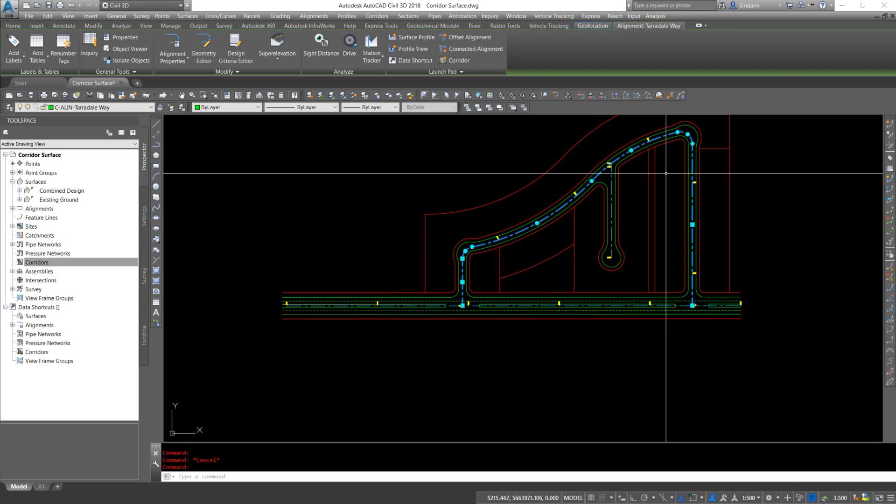So when we design a corridor, first we need to have a road center line. So we've designed our alignments for our three major roads here. So we have one going east-west, we have our subdivision road, and we also have our cul-de-sac alignments. Now when I zoom in on the ends of these, they are touching the other alignment. Now there's a display issue here, but they are perpendicular to the other alignments, and we'll need that when we go to design our intersections.

So we have our alignments laid out, and we've also created our vertical baselines. So we have, and I know I have a couple extra profiles in here, but we have our main road here. We have our subdivision road, and we also have our cul-de-sac road here. So we've designed horizontal and vertical, and now we can go about creating a corridor.

Now this is a little more in depth than creating a highway corridor. There's a few more things going on. There's also some things we don't really need to worry about in a residential road. Super elevation will be one of those things we do not have to worry about. The speeds are low enough. We just don't need to super elevate the road, and people are generally not going 50, 60 kilometers an hour around some of these tight corners.

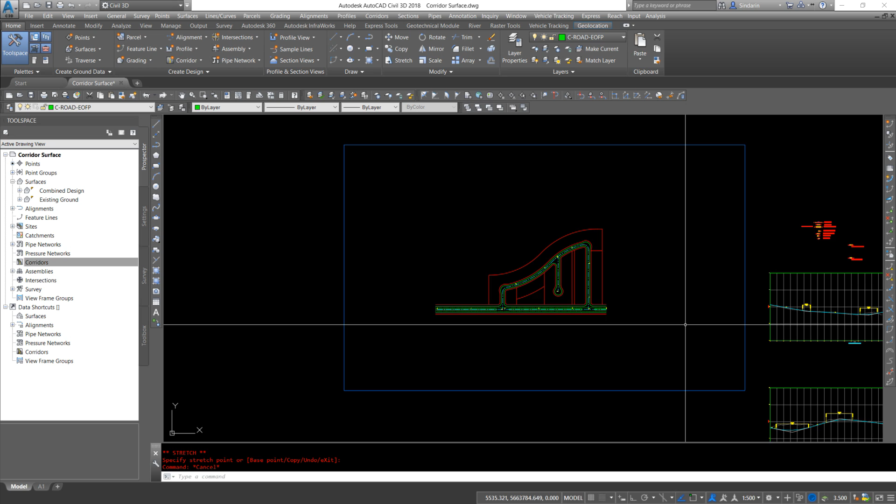So we'll start this off, and we're going to end up making 3 or 4 different corridor models. I like to keep my intersections separate, as they add quite a bit of information in your corridor. And if we keep them separate, we can still paste everything together at the end, and it will work just fine. It's a workflow thing. It's drawing stability and just trying to make your drawing work faster.

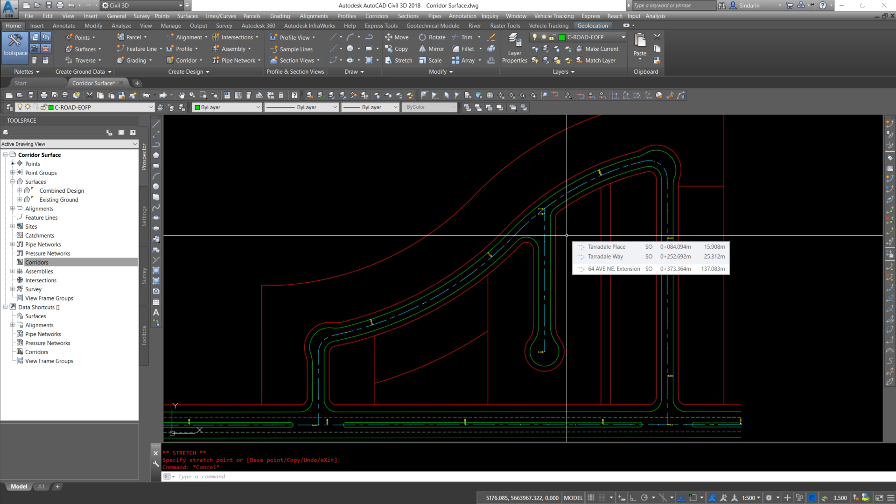So again, we have our alignments, we have our profiles, and I've gone ahead and I've already designed the vertical baselines here, and I see there's an issue that happened with this one when I deleted some stuff, but we can take care of that. So first things first, we need to make a corridor of our main road. Actually, before that, we need assemblies.

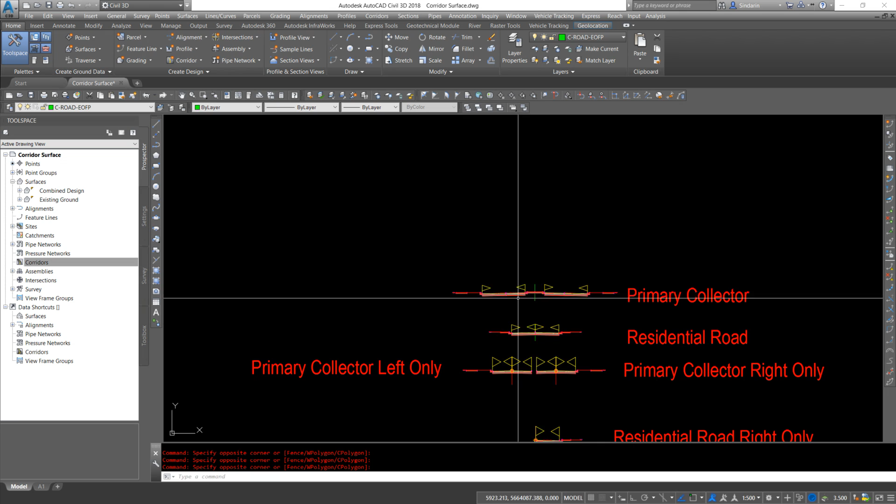So we'll start off with our 2 basic assemblies. We have our primary road, which is the one going east-west, and our residential road. So these 2 right here. And those will come from the design guidelines provided by the city. Our primary road has 2 lanes each direction. Our residential road's a little bit smaller, has sidewalks in certain locations. So you'll go to the city guidelines and design those. So we have our 2 assemblies, and don't worry about these other ones yet.

So we'll go to corridors, create corridor, and we're just going to name this residential road. Keep the default style. Our alignment, we need a typical alignment or a starting alignment, and then we can add things to it afterwards. So I'm just going to choose the east-west road down here. So my 64th Avenue extension, my 64th Avenue design profile.

Now again, naming things, keep things named properly. So I've named this 64th Avenue design. I know this is my design profile. I want it to follow this. This one will be my existing ground profile. So I'm choosing design here. On my assembly, my primary collector assembly.

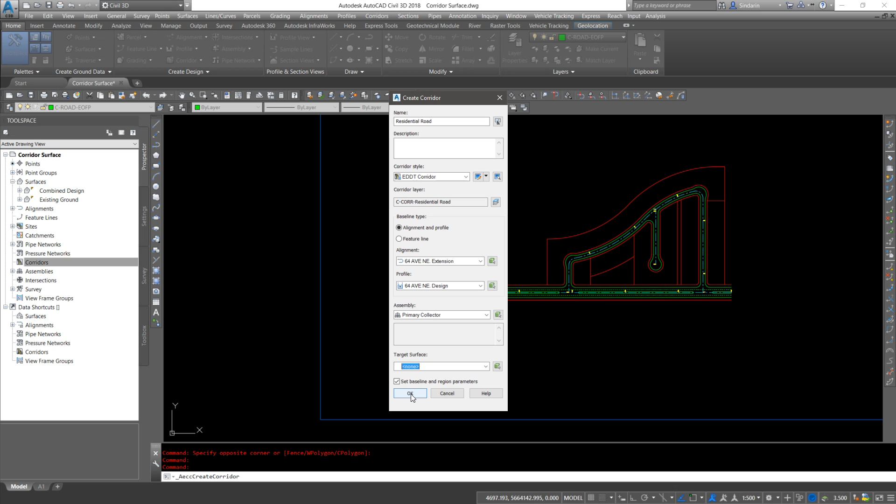And I don't want to target surfaces at this point, as we will set that up in our surface grading at a later time when we do our lot grading. So we'll leave the set baseline and region parameters selected. It won't create a corridor yet until I click OK. So I've clicked OK, and here's my starting corridor. So my 64th Avenue extension, that has highlighted my road east-west. This is what it's going to build. Let's go ahead and add these other 2 roads in, and then we'll go and start removing unneeded areas.

So the first thing I'm going to click on is add a baseline. This one I'm going to name residential road. Baseline type, alignment and profile, my alignment. I'm going to choose the Tarradale Way one. Actually, let's name this Tarradale Way. So I'm going to click OK.

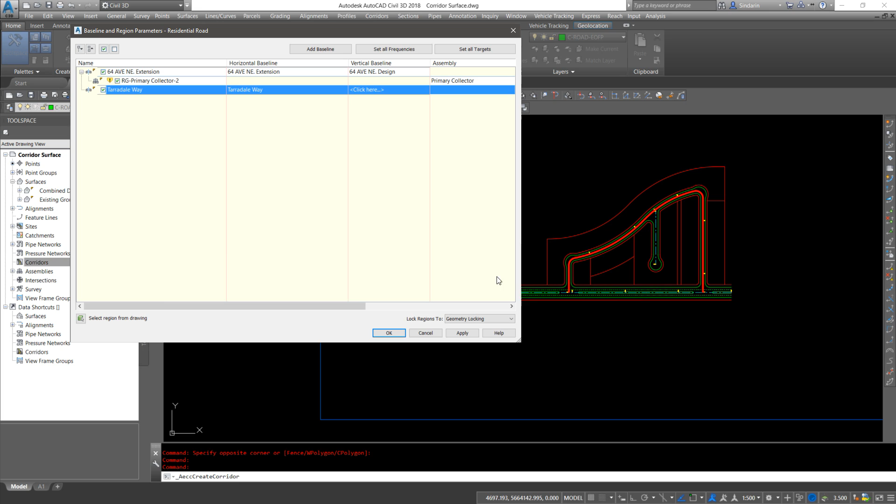And it's added a secondary baseline, and then when I click on it, you can see it's highlighted this alignment as well. My vertical baseline, I already have a Tarradale Way design, so I'm going to click OK. The next thing I have to do is right-click on the Tarradale Way and add a region. So I need to add a corridor region to this in order to build it.

Region name, I'll just leave blank for now. And the assembly I want to use is the residential street one. So my road east-west is a primary collector. My internal roads here are residential streets.

So we've added Tarradale Way here now. Let's add in our cul-de-sac. So I'm going to add another baseline. And I believe, yeah, Tarradale Place. And we'll click OK. And again, I've had my Tarradale Place design. I'm going to right click, add another region, and choose my residential street.

So I have my 3 roads in right now. And if I move this out of the way and I click on them, there's Tarradale Place, Tarradale Way, and 64th Avenue. Now I'm going to set all frequencies, and again, be careful with this setting, as the more frequent modeling you have, the slower your drawing will perform and will update. But I'm going to set it to 5 right now, just to give me a little bit more of an accurate model. Feel free to leave it at 10.

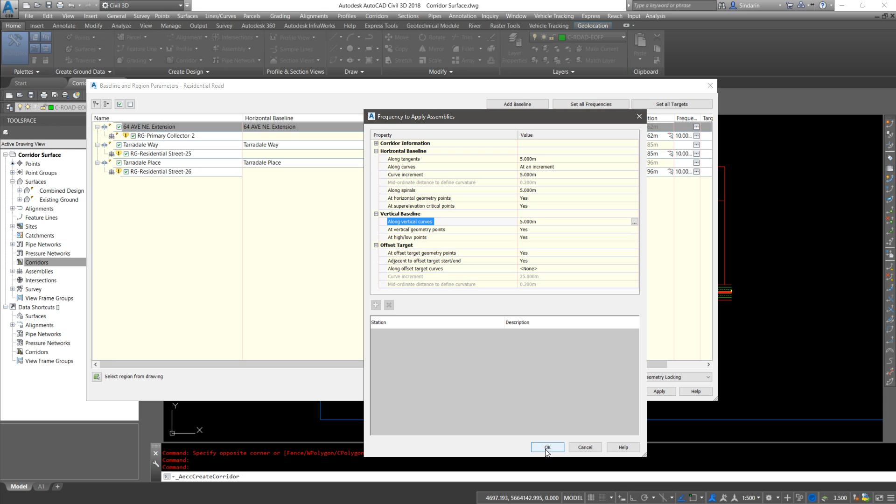You can set it to 1 if you want, but you might be sitting there for a few minutes while things rebuild. So I'm going to click OK now, and we're going to see what Civil 3D creates for us. So click OK, click Rebuild the Corridor, and this is what we're left with. So my road east-west, and then my internal roads.

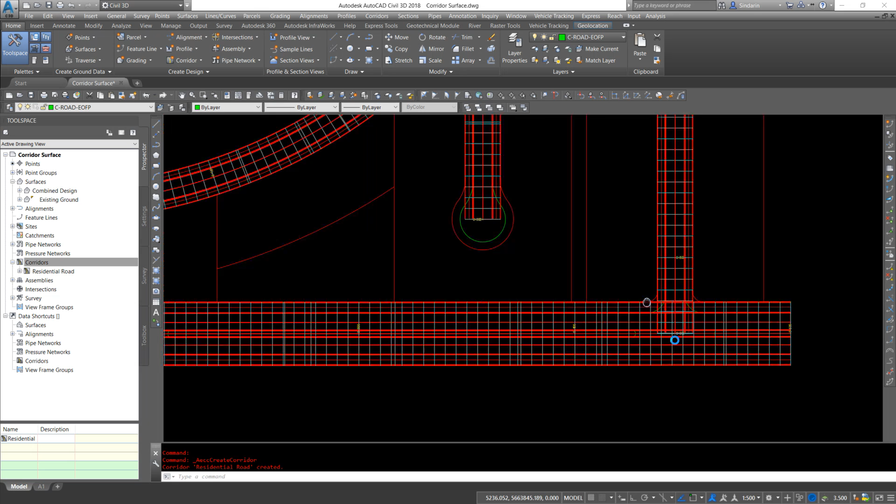But if I click on my corridor model, you can see that it's building the residential roads into my main road. Now, if I go to make a surface from this, it will be all messed up. It's not going to look nice, and there's going to be glitches, and you could possibly cause problems. So part of the big thing with modeling a residential corridor is adding more regions under your 3 main headings.

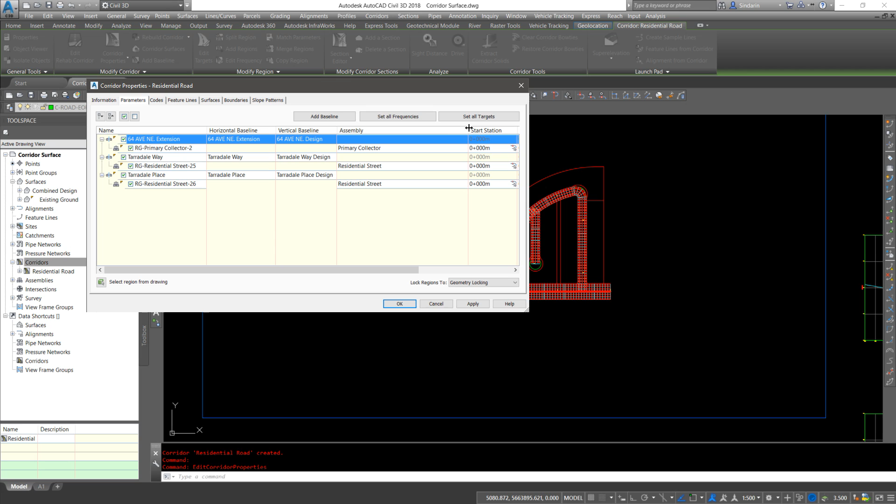So 64th Avenue Northeast, we're going to have 3 regions here, and we're just taking care of a part later on for when we go to add in our intersections. So I'm going to make this a little bit smaller right now so we can see everything. And we're going to have to concentrate on the start station and the end station. Oh, what happened there? So the start station and the end station.

Now, we want the road to build approximately from here to, we're going to go maybe 40-50 meters on either side of the intersections. So we're not going to build a road where this intersection is going to be. We'll take care of that after with the intersection tool. And the same over here.

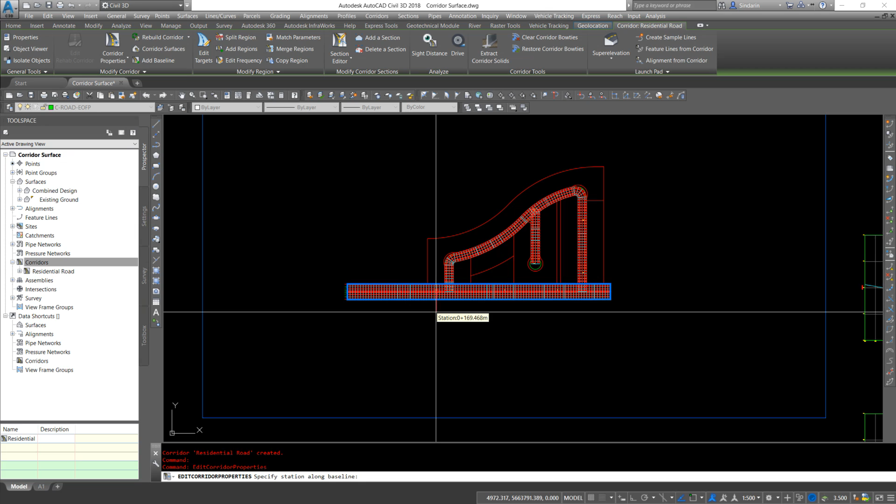So my start station will be 0. My end station, I'm going to use a station picker here. And I'm going to just click approximately there. So to the west of the intersection a little bit. And again, station 163, give or take a little bit. Now, to keep things organized in my drawing, I'm going to rename this 64th Avenue Northeast West Section. So this is the west section of the road that will be built.

Now, to model the rest of it, as you see when I click on this, it only is going to model this. If I hit apply and rebuild, you'll see. We now need to tell it to model in the center section here. So I'm going to insert region after, so right click on 64th Ave Northeast West section. Insert region after. I'm going to set it to primary collector, and I'm going to name this one 64th Ave Northeast Center Section.

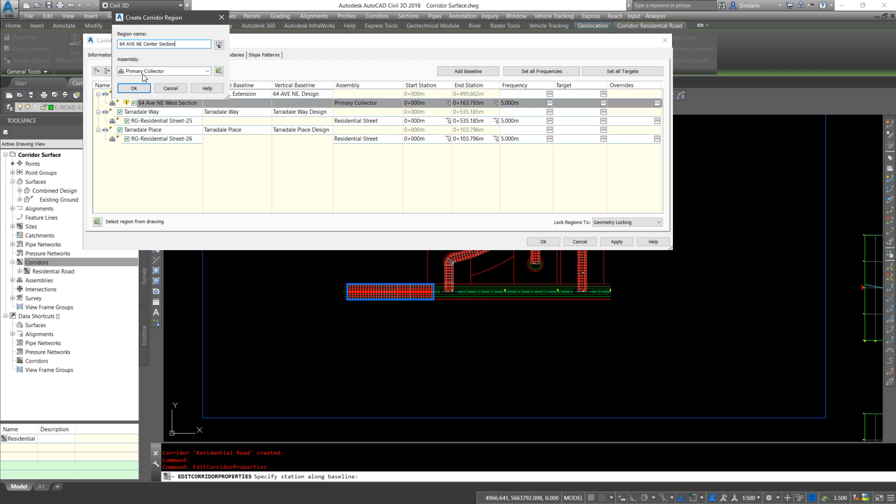So the more you can do to keep yourself organized in your drawing, the faster you're going to draft. You're going to know what you're clicking on. You're going to know when you're clicking on it. If you don't name anything, you're going to have a heck of a time trying to figure stuff out. So 64th Avenue Northeast Center section, primary collector, we'll click OK.

And Civil 3D has gone and said, okay, we see that this station ends at 163.793. We'll start this one off at 163.793. But we don't want it to do that. We want it to model on the right-hand side a bit. So I'm going to select the station picker again. And I'm going to drop it approximately here. And again, we'll clean all this up after when we get our intersections done. And my end station, station picker, I'm going to go approximately here.

So let's add in the east section now. So if we click on here, we're building that. If we click on there, it hasn't built anything yet, but let's apply and rebuild. And it's not highlighting it for some reason, but you see it popped in there.

Let's add our last section in. So we're going to insert another region after. Primary collector, rename it, 64th Ave Northeast East section. Then we'll click OK. Again, Civil 3D has taken the end station and just said, okay, there should be a road here, but we don't want it to build a road yet. So station picker, we'll select right there.

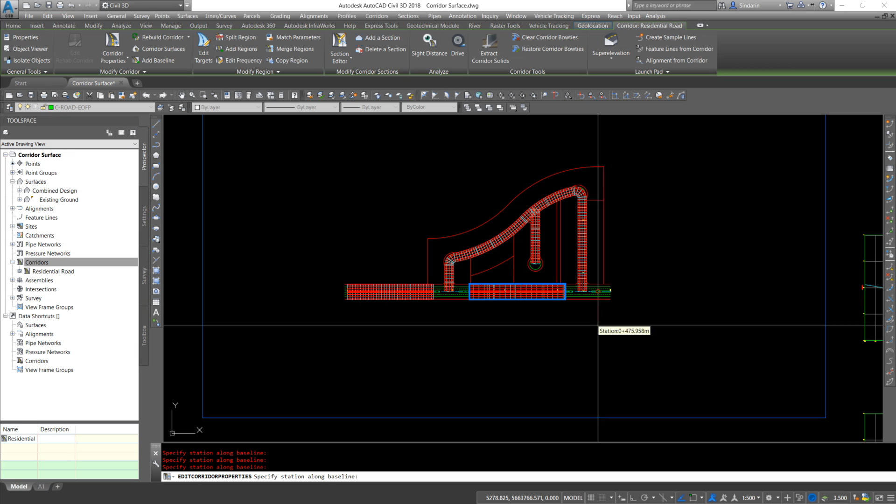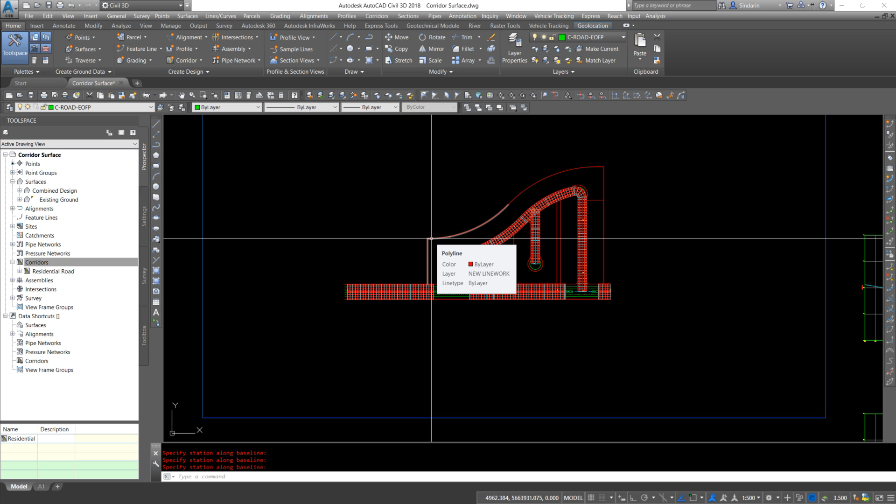So let's change all our frequencies. So these ones have gone back to 10. If you want, set them back to 5. And then we'll hit OK. We'll rebuild the corridor. So we have now gone and turned this south road into 3 separate pieces, but they're all in the same corridor. They're controlled by the same baseline. They're controlled by the same assembly. So we've gone and done that for this road.

Let's now do it for this road. And I'm going to go and take care of a couple things beforehand that I know we need to worry about a little bit later. So our road over here, we'll have to trim it around our knuckles. We'll have to trim it around the intersection. We'll have to trim it around this knuckle. We'll have to bring these two back a little bit. So select your corridor, right click, corridor properties.

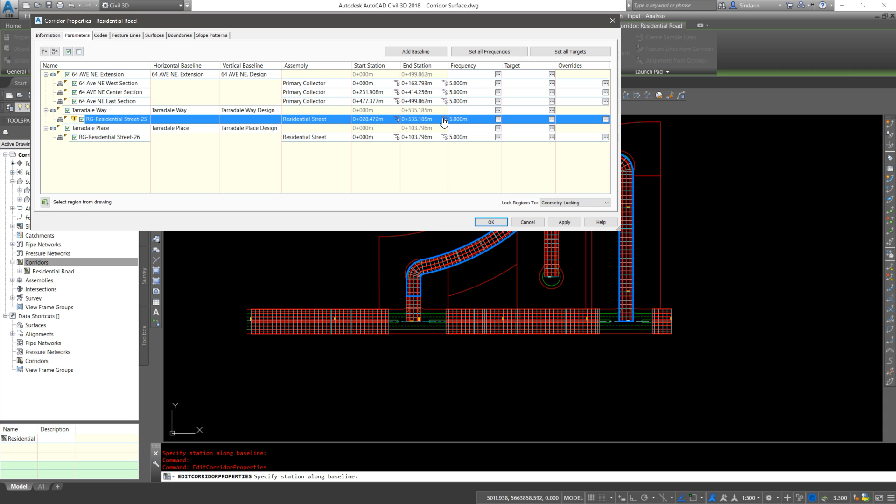So that is what I've called Taradale Way, and it's kind of hard to see on here unless I select this, but this is the road we want to modify. So my start station, I want it to be, again, station picker, approximately there. Now my end station for this one, again, station picker, I want to zoom in and I want to select the end of my knuckle arc. So let me just click OK for now. And if I click on my road edge, the end of my knuckle arc here, the outgoing arc, that is where I want it to end.

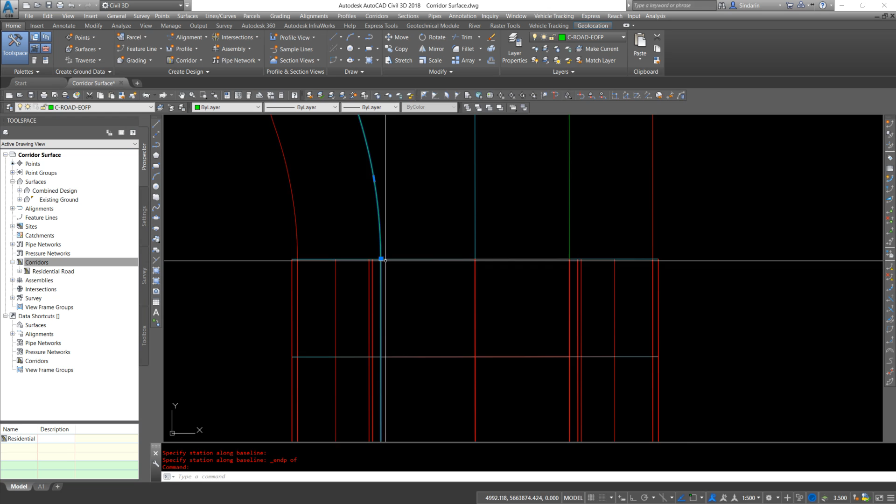We need to apply a different assembly, or 2 assemblies actually, for the actual knuckle. So back into corridor properties, and we're going to do this a couple more times as we do the other knuckles. So this is Tarradale Way West, just to keep yourself organized. I want to insert a region after, and again, Tarradale Way North, but it's the west section. And you're going to see why I'm naming these things here shortly as this window gets more and more populated. I want it to be a residential street as well. And I'll click OK.

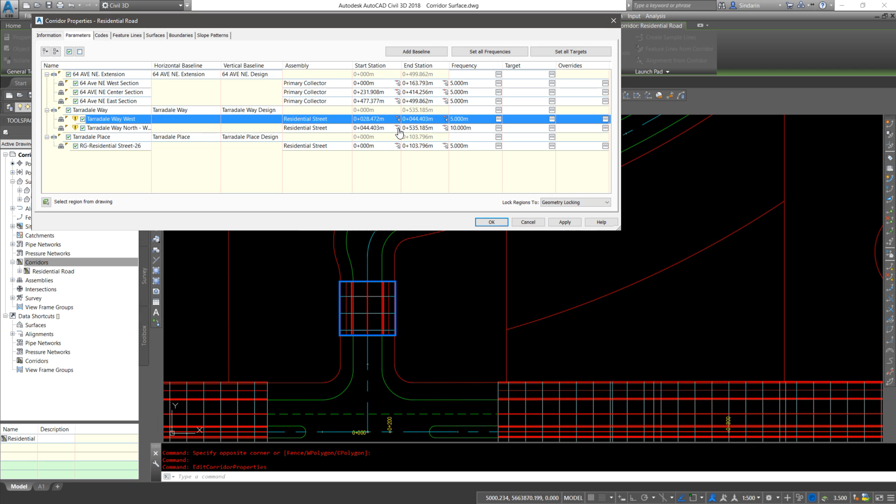And for my station picker, I'm going to pick the other end of the arc. So we have an arc here, we have a larger arc, and we have a smaller arc. So I'm going to pick the end of this other arc. And then ending station picker, I know we need to break it around the intersection, so I'm going to break it in here somewhere. And again, around the intersections we can clean it up afterwards, so don't worry too much about the station right now.

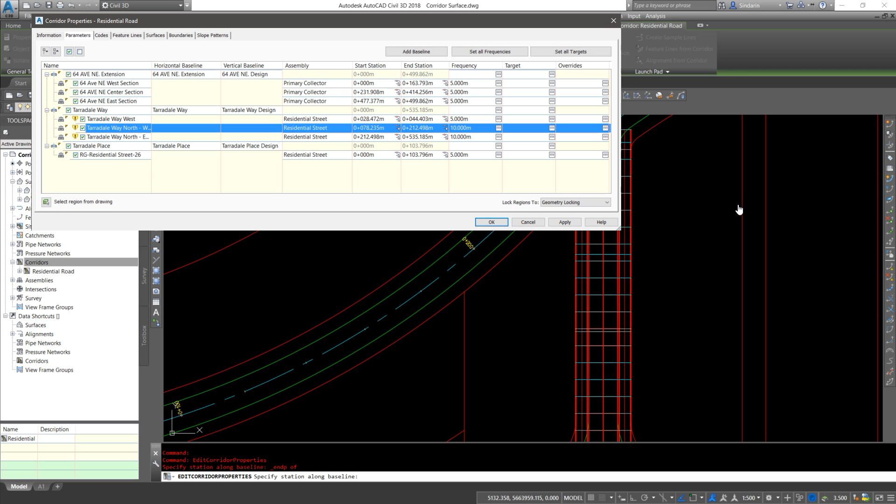I'm going to insert an additional region after, name it Tarradale Way North East section. Set it back for residential street. Click OK. My station picker, I'm going to pick on the right-hand side somewhere. My end station, we're going to set to the beginning of this arc. So the initial arc again. So we have 2 knuckles here that we need to worry about.

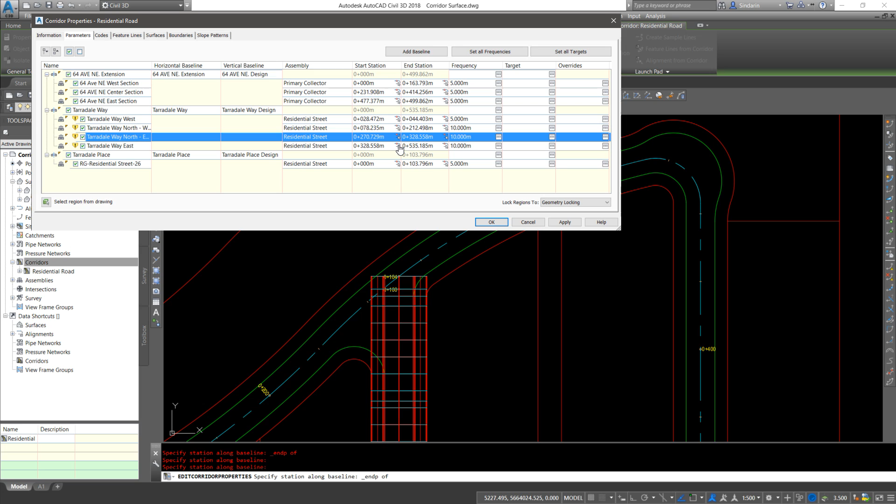Again, insert another region after. Tarradale Way East. We'll set that for Residential Street. We'll click OK. Station picker for the start station. We're going to select the arc going out. And the final station, we don't want it to build into the road down south, so we'll select approximately there.

So we'll set all frequencies again. We'll go to 5. And again, Civil 3D will default to 10. Whatever your CAD lead has set up, it'll default to that. We'll click OK. We'll click OK. We'll rebuild. So my corridor is now in 8 pieces if you want to look at it that way, but it's still all one corridor. It's still all one object, and it's all building off that one window.

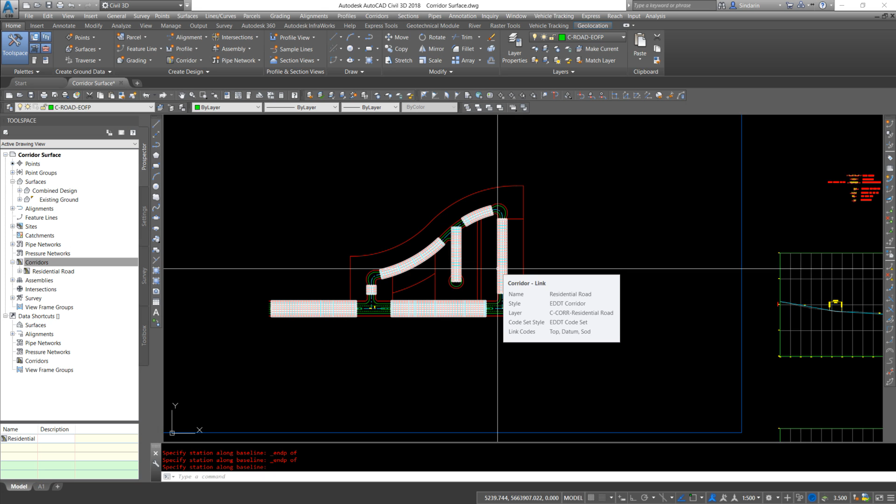So let's change this cul-de-sac one a slightly different way. So if we click on things, and again, be careful when you're grip editing stuff. If we click on the object, we see some grips here. Now these correspond with what's in that window. So I can select this grip and I can bring it down a little bit. So I want this to build maybe to there.

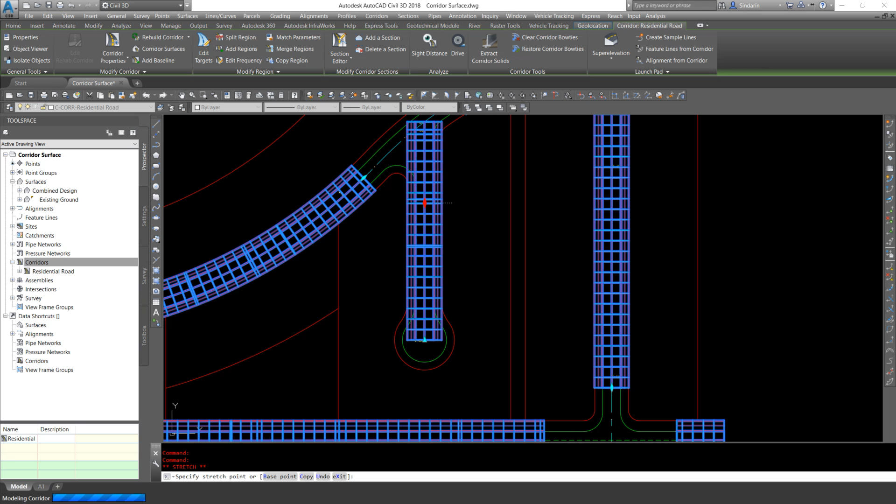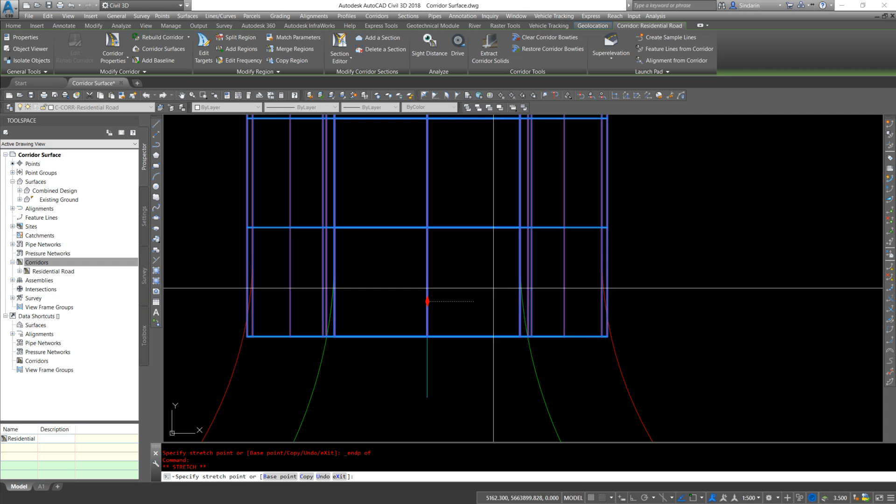And again, on the bottom one, if I want to click on the grip, same with the knuckles. I want this to end at the end of this green arc. Now again, be careful when using snaps. As we see, that didn't quite work. So I'm going to try it again. Go to the end point of this green line.

So these are where the arcs for our knuckles and our cul-de-sacs end. So that is the last time you'll see, if you want to think of it this way, this part of this road section. After that arc, your road is going to start getting wider, and we need to perform some additional commands in order to do that. So we got our road sections here. Let's save our drawing. In fact, you should save it quite often, being first time through this.

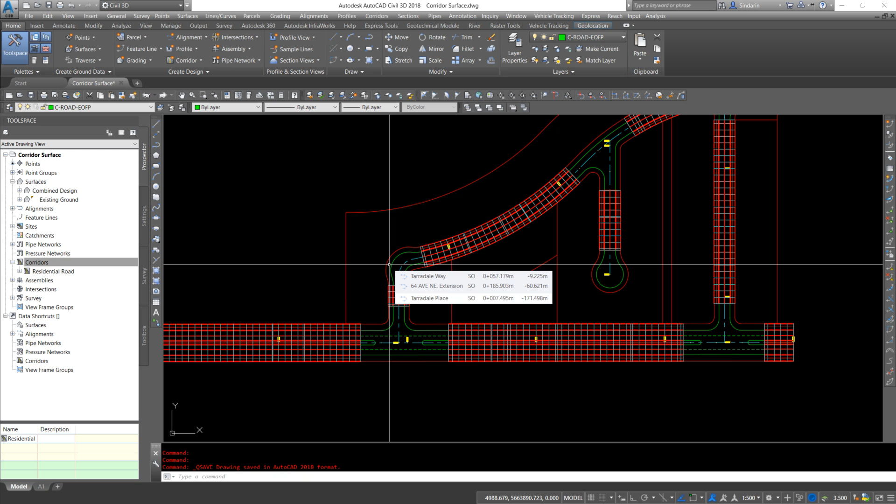So once we have our drawing saved, the way we need to handle our cul-de-sacs and our knuckles is slightly different. So when we go through a knuckle, and we'll start with the knuckle over here, I'll run all the commands the one time, and then I've got the other 2 already generated for me. So we have our west knuckle here. We need to apply a corridor target is what it's called. So we need to have our assembly follow a different baseline for this so we can build the road properly.

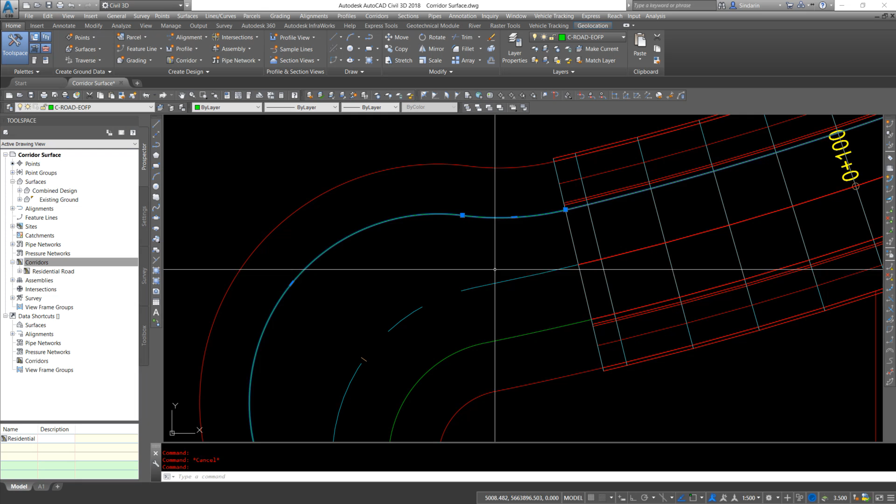So if I zoom in, I click on this green line. This is my edge of road. My corridor stops here. My corridor starts again here. So the first thing I'm going to do is draw a polyline. So I'm going to have my polyline follow this. So I've snapped to the end of the green line. I want to arc with the second point, and I want to snap to the mid, and then I want to snap to the end of the first arc.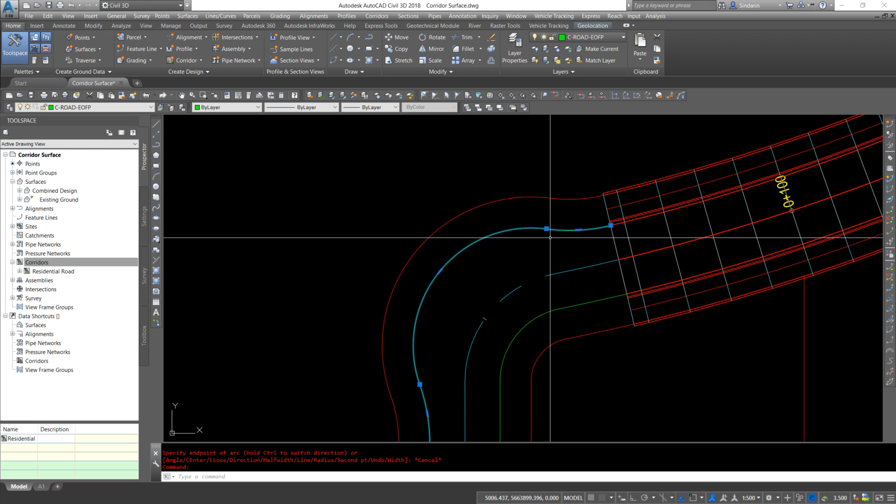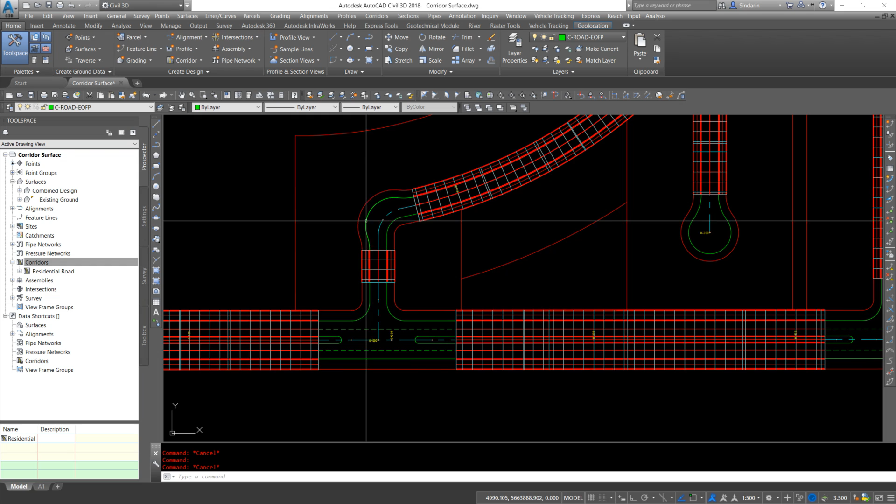And again, second point, midpoint of this arc, snap to the end. And we'll do that a third time. Second point, mid, end. So I've got my polyline. I'm going to hit escape. If I click on it, I now have one polyline instead of the long one that's along here. So one polyline here. Now we need to turn this into an alignment. Well, why do we have to do that now? We need to tell the corridor to build an assembly along here. So we need to define a horizontal and a vertical.

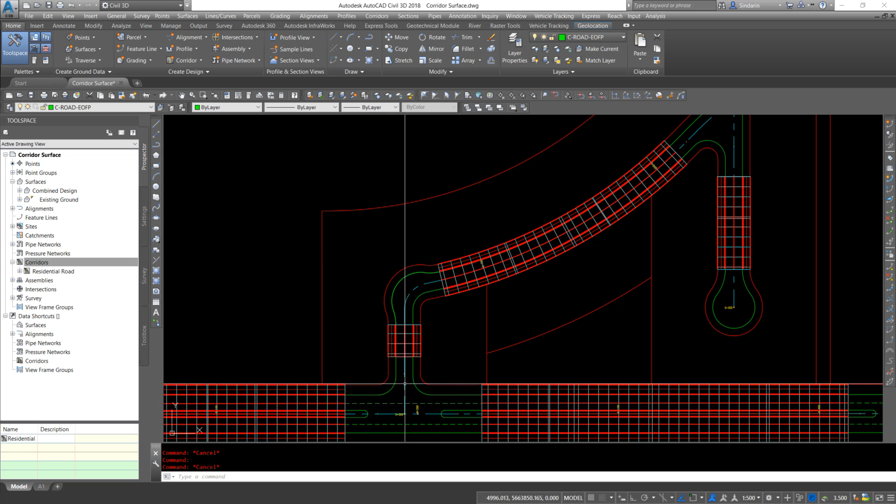So as you see, I have my 3 main alignments here. I also have 2 additional ones here. So this is for my cul-de-sac. This is for my northeast knuckle. Let's build one for the west. So direction 100% matters when you are building these. Your alignment should try to go the same direction as your main road alignment. So station 0 down here, increasing up here. We go to station 200, for example. Your station should be 0 here, come up around the corner, and end at about 30, maybe 40, whatever it happens to be. So we're going to, alignments, create alignment from a polyline.

I'm going to select the polyline. I'm going to make sure to select the polyline that I just drew and traced over top. So I'm going to hit enter. And even though I drew it in a north direction, Civil 3D for some reason has flipped it around and is pointing south. So this is how we can tell if our alignment's going the right direction. Knowing that 0 is down here and it increases in station to the north, I know this needs to be reversed. So I will reverse that alignment. So just hit R, enter.

Now again, name things as descriptively as you can. We only have 2 knuckles in this project, so I'm going to name this west knuckle. Type, we'll leave it for center line. Start station is OK, 0. Remember, no sites for alignments. Center line, it'll layer it for us. We'll deselect add curves, and we want to erase the existing entity. We don't want it to put curves as we've already done that. So I'm going to click OK.

And I now see I have an alignment starting at 0. It goes around the corner and ends at station 44. So there's our horizontal. Let's quickly create a vertical. So profiles, create from surface. I want my west knuckle. I want existing ground.

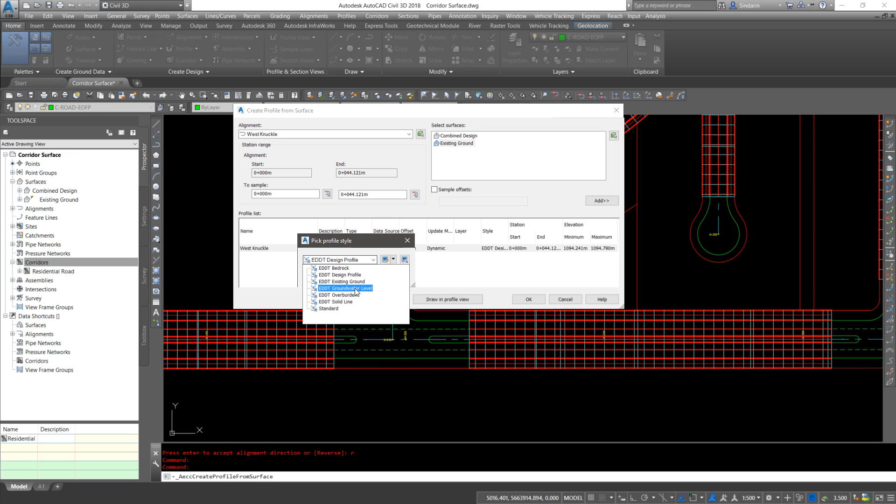And make sure it's set to the existing ground style. So click on the style button here. Existing ground. Okay. We will draw in profile view now. And we've already done this a few times, so I'm going a little bit faster. I'm going to name this west knuckle. Just west knuckle for this one.

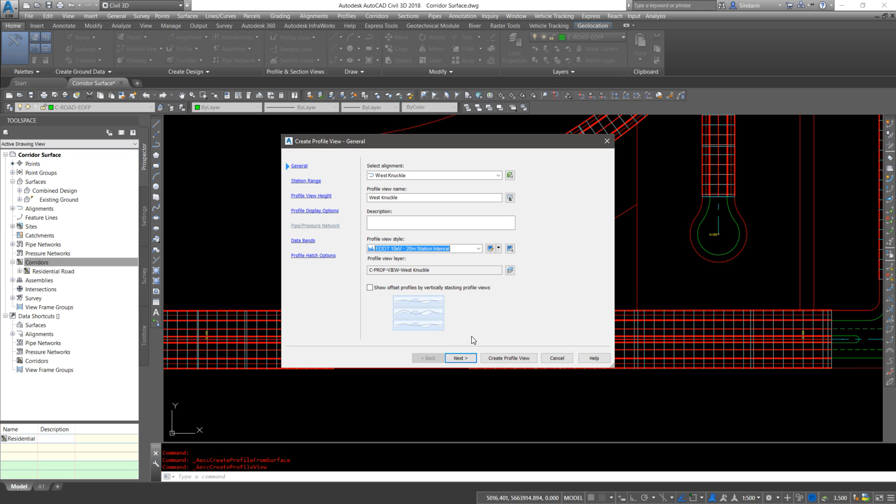And then I'm going to set it to 10 times vertical, 20 meter station interval. And then create profile view. So I'm going to place this just beside these other two. And it's drawn the existing ground for me.

Now, when we design a road, we need to be able to tie into the design elevations. So we don't have a surface built for this yet. So let's go into our corridor properties and define a surface. So select your corridor, right-click corridor properties, surfaces tab. We want to add a data link. So top left corner, create a corridor surface. Specify code, we have to make sure to click the top button to have it build it.

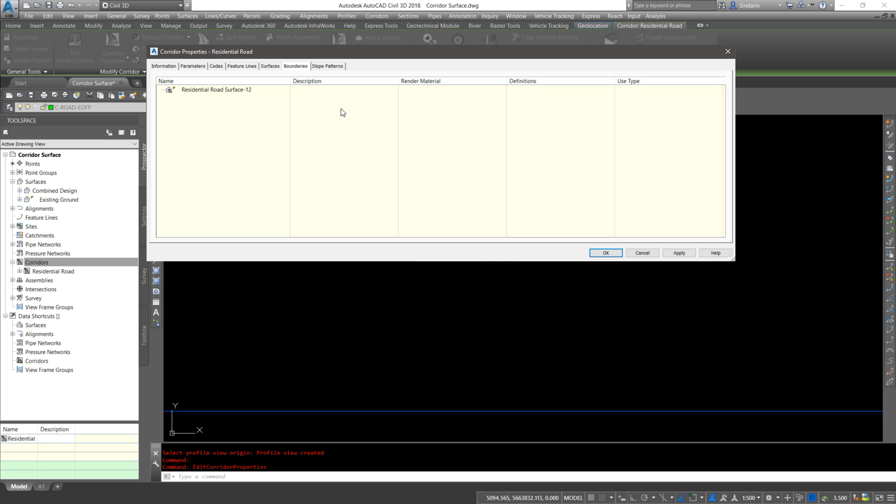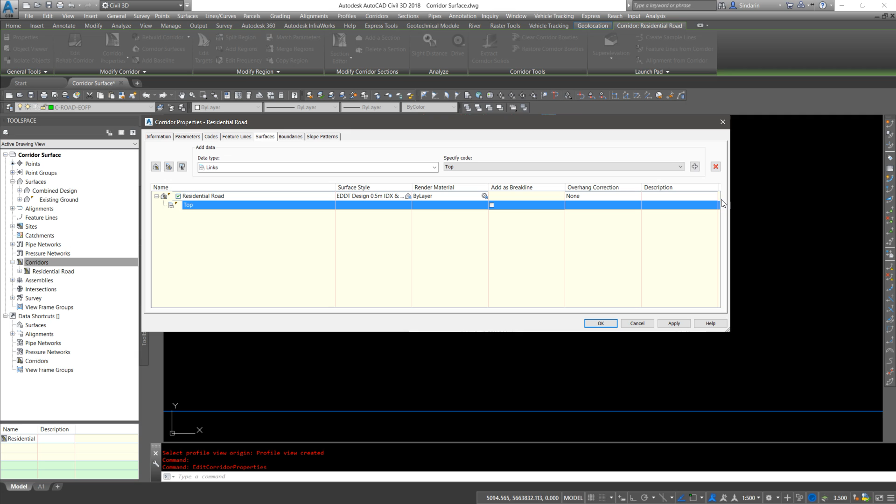Now, we're not going to add a boundary because our corridor is very segmented and it will probably only build a surface around this section. So, back again under the surfaces tab, residential road, we'll just name it residential road. And I'm fine with the style of being 0.5 and 0.1 for now. We can clean it up later. So again, surfaces, just name it residential road. Make sure to add in the top column. We'll click OK. And we'll click rebuild.

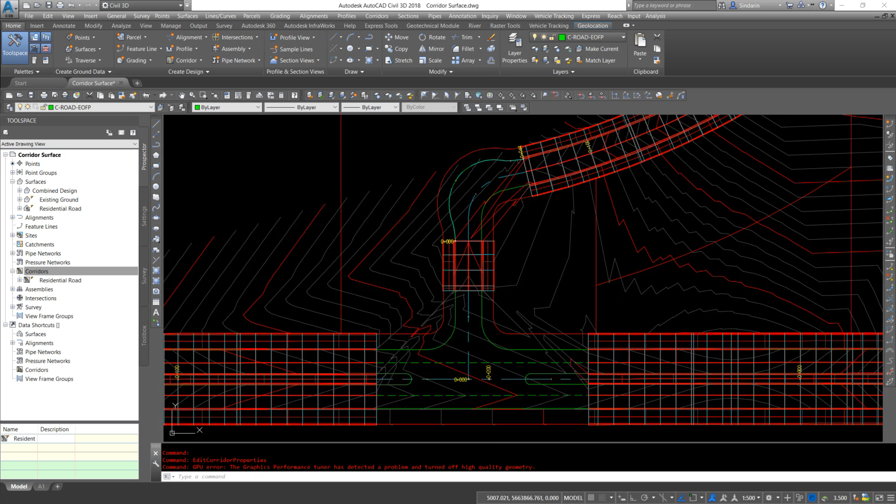So this has made a little bit of a mess for us. And the reason it's happening over here is because part of my profile is missing. But I can clean that up later. So we now have a surface here. Again, yes, it's a bit of a mess, but what this means now is that we can go into our profile, the one we just made, so our west knuckle. We're gonna add that design surface in so we can see where those road edges are.

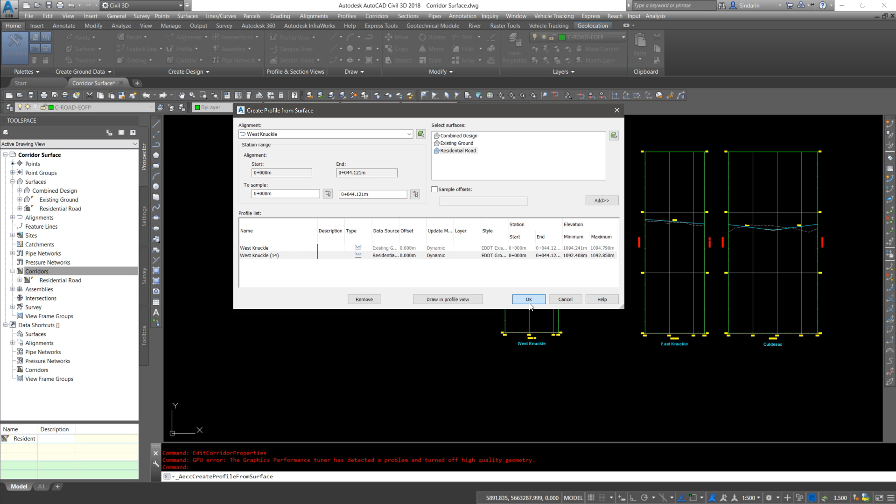So we're gonna go profiles, create profile from surface, choose our west knuckle again, add in our residential road surface. Actually, let's set it to groundwater so we can tell the difference. Again, we're just using this temporarily to know where to put our design line. So I've set that for groundwater. I'm just going to click OK now. So our existing ground is up here, but if we zoom in down here, this is where our design line is.

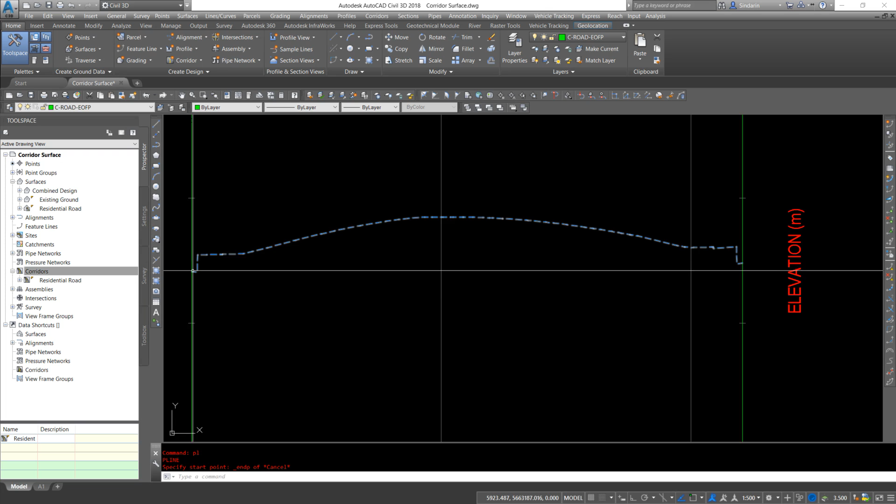Can I snap to the end of this properly? Yes. So knowing this, we have our curb down here, it comes up, and then it's just building whatever in the middle, and we have a curb line down here. So what we need to tie into are the ends of these blue lines over here. So again, I'm going to create a profile by layout. I want to draw a profile on my west knuckle. I'm going to name it West Knuckle Design. Don't worry about any design criteria. We'll click OK. And it'll bring up our West Knuckle Design tools.

Now when we're drawing these, as the distance of 44 meters is greater than the distance it would be along the center line, we still need to ensure that there's positive flow. So we may have to put in a low point, we may have to put in a high point, as long as water's not pooling and staying in the knuckle. So we can start off with just drawing a temporary line for now. We can add in points afterwards. So I'm going to draw just plain old tangents for now.

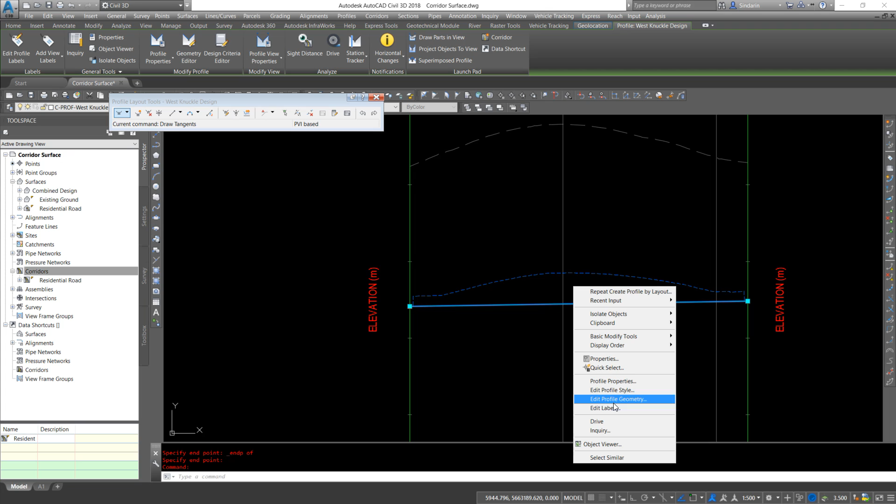I'm going to snap to the end of this curb line. So this is what I want to tie into. If I hover over here, it doesn't look like there's very much slope, but we'll find out here in a moment. And I'm going to snap to the end of that. I'm going to hit enter. So I've defined a one slope line. So let's go ahead and add some labels to that. So select it, right click, edit labels, lines, profile grades 2.5 is fine. Okay. So this is currently sitting at 0.16%.

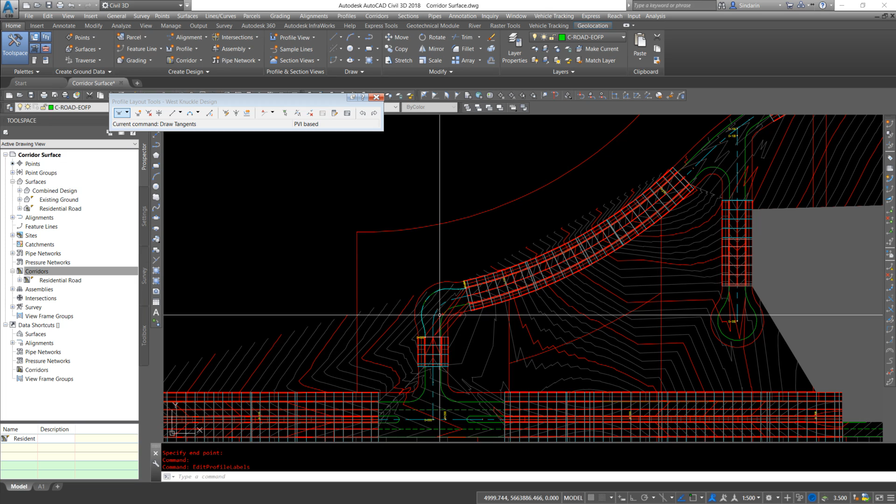So there's a couple things we can do. We can add a high point, which again, you have to pay attention to where your surface is grading, but my entire design comes down. I've designated this to be a low point. So again, when you do your main corridor, pay attention to what's going on. So I'm going to create a low point in here. So we're going to add in another PVI. So select the insert PVI. I'm going to click right about here. And then I'm going to hit enter.

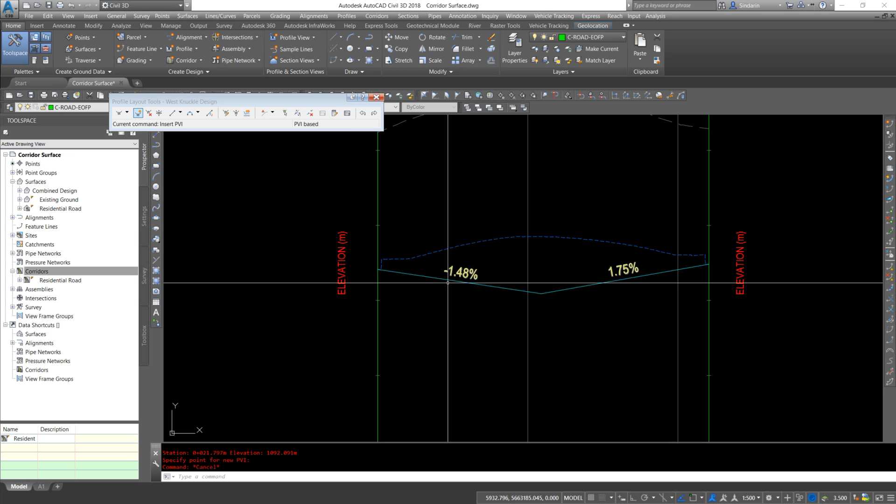So again, we can fix this afterwards, but I have minus 1.48, down to 1.75. That's a little too steep for what I want. So I'm going to come into, again, the same window. We'll select the profile grid view, which brings up this window over here. Make it a little smaller so we can see what's going on. And I'm going to change my grade out. So let's go minus 0.75 for now and see what happens. So it goes minus 0.75 down, 1.04 up.

So as long as we can keep it steeper than 0.5%, minus 0.5 or 0.5, that is enough on concrete to ensure positive flow. So I'm going to leave these values for now. I'm going to build that section of the knuckle. I'm going to see what it looks like in my corridor. So minus 0.75 down, 1.04 up. I'm okay with this. So we'll close this. We'll close this. And I'm going to pause the video momentarily and fix that surface.

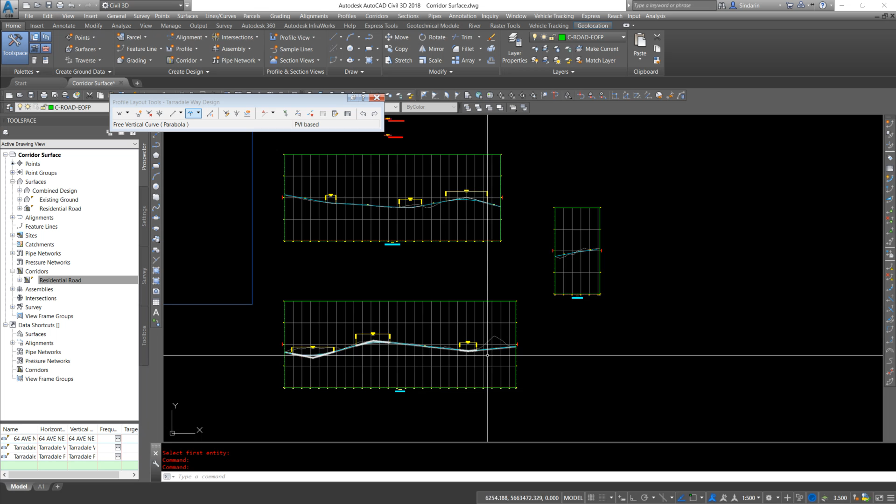Okay, the surface is being fixed. It was causing me a bit of lag because it was modeling contours all the way to 0. I didn't have any design information over here, so that's why Civil 3D was doing that. Now, we've got our design, we have our existing. If we are done with this line, we can delete it now, but I'm just going to leave it temporarily. We will need it again, more than likely. Roads, they adjust up and down. Our first design is never the perfect one.

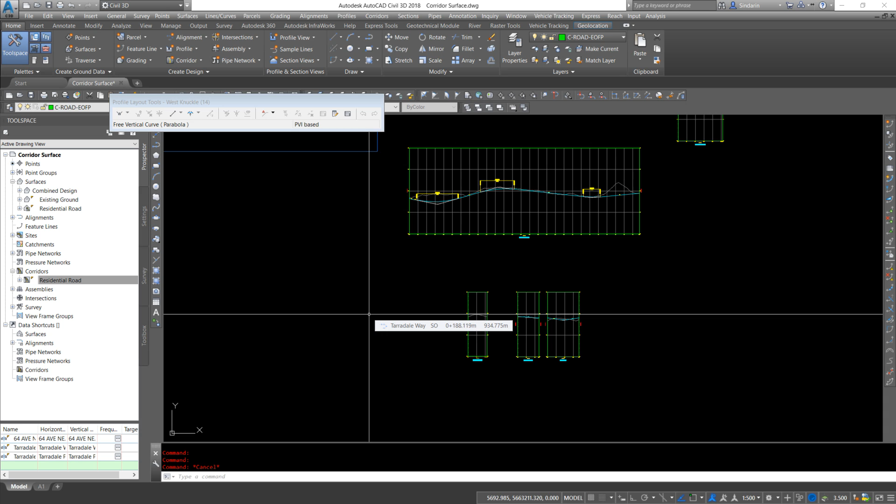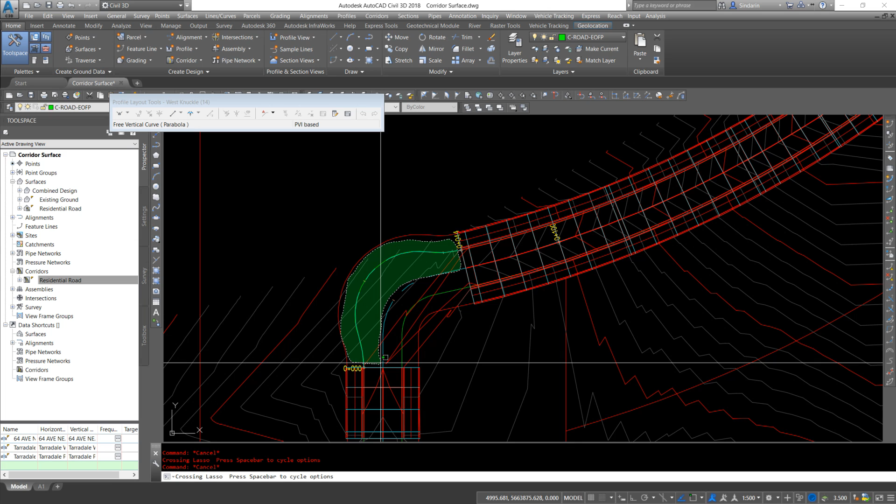So coming back to our corridor now, we need to go and add this into our corridor. But for that, we need additional assemblies. So the way we need to tell the knuckle to build, we need to specify this section of road as its own little assembly. So we need to specify that one separately. And then we need to specify the knuckle one separately. So this ends up giving us quite a few more assemblies in our drawing.

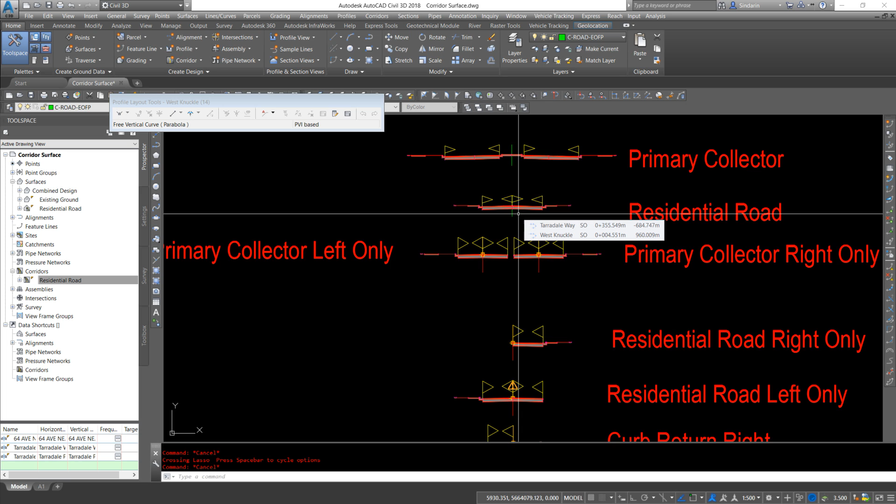So to run through them, and these are the ones that will be needed for the intersection, for the knuckles, for the cul-de-sacs. Everything you need to do will be covered with these assemblies. So we start with our primary collector and our residential road. Now, I've taken the primary collector one and I've created a left side only. So it still has the lane here. We have a lane on the outside. Again, I didn't worry about lane widths. Civil 3D will take care of this kind of for us automatically.

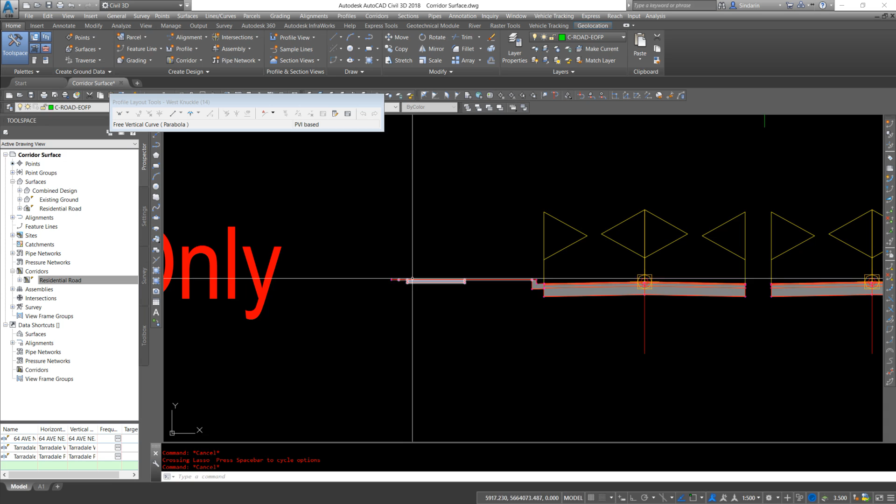But we have our curb, we have our sidewalk, and our additional little piece at the end here for building off our grading. So don't worry about this additional piece now. Just build your curb and your sidewalk lines. And I also have the exact same one for the right hand side. So we got our curb, our sidewalk.

And again, when you're making these, name them properly. If I go into the properties tab, select it again, primary collector, and I've just named it daylight right, primary collector daylight left. So we have 4 assemblies here. We have 4 more. So name things properly. When we get into that corridor properties window, it's going to help you immensely.

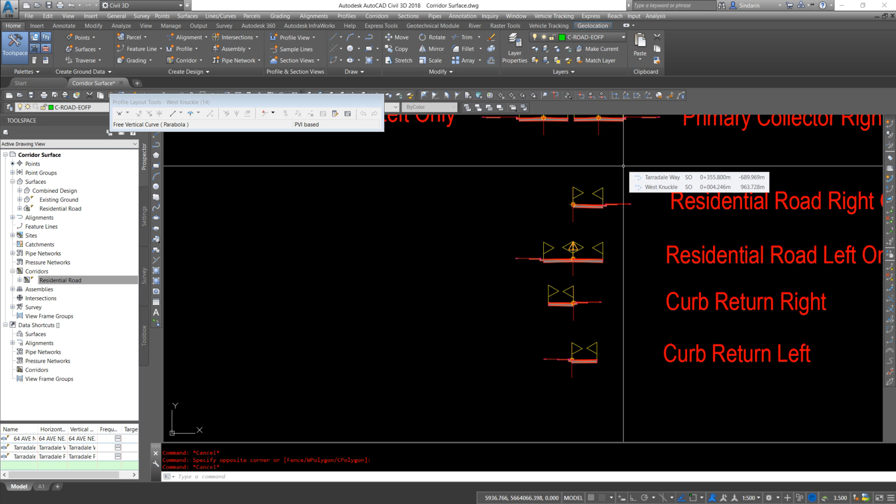We need our residential road right side only. So I've just copied that one, deleted the stuff on the left. We have our road, our curb, our sidewalk. We have our residential road left only. And ignore this warning symbol and pay attention to the right hand side. Now we need this for the cul-de-sac area. So when we're building the cul-de-sac area, Civil 3D doesn't quite do a good job because of the angles of the road, so we just need to trick it in.

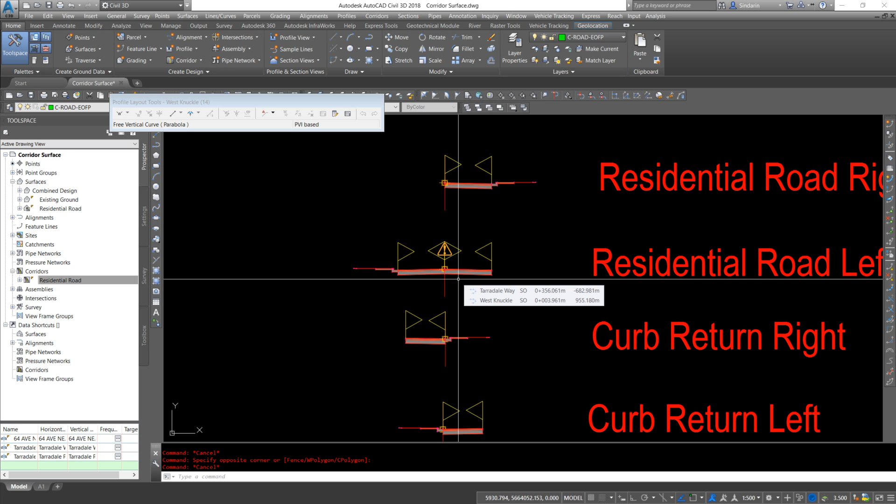And then we have our curb returns right and left. So when Civil 3D builds an intersection, it will use the right assembly. And depending what side of the road your knuckle is on, the direction of travel, you may use the right one for your knuckles as well. But with our road, we need the curb return on the left. So again, the center point of the assembly is right beside your curb and gutter. Here's our road lane, here's our curb and gutter, here's our sidewalk.

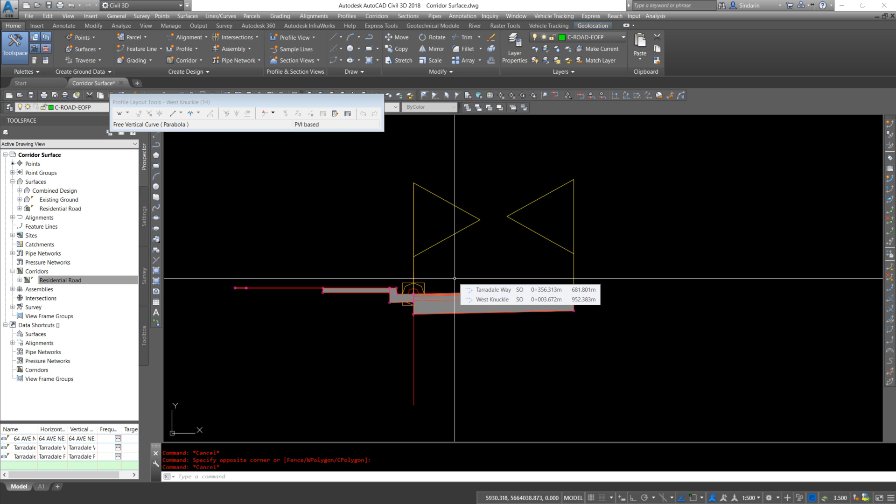Same with the left, curb return left. We have our road, we have our gutter, we have our sidewalk. And that is in the middle as well. So when we drew that knuckle alignment and profile, we will be using the curb return left to define that as a road. So this center marker will follow down that alignment, will follow down that profile.

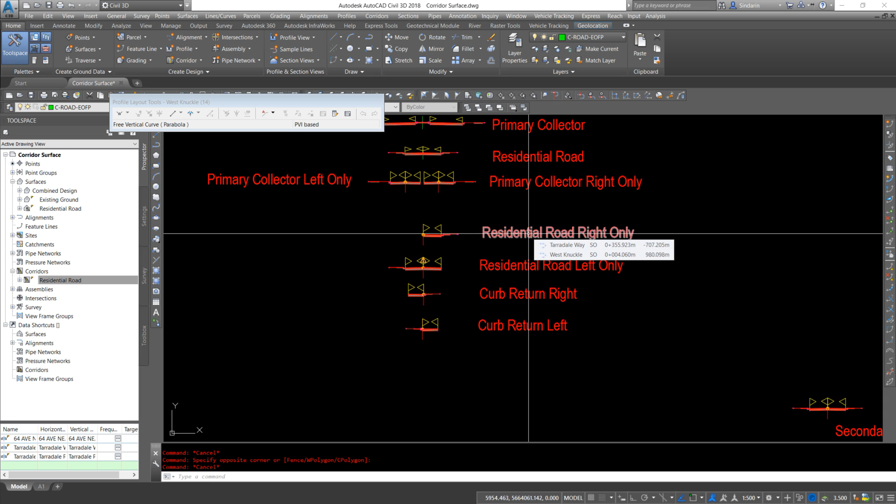So we need to use 2 different assemblies here for that knuckle. We need our residential road right side only. So I'll go build one piece and then we'll take a look at it. And then we'll do our curb return for the knuckle. So back to our corridor.

I'm going to select our corridor. Go back into corridor properties, the parameters tab. Now we want to modify the Tarradale Way. So we have our west section, then we have a blank empty area. So this is where I'll insert the right hand side only. Because direction of travel is from here all the way up, that's how we know it's our right hand side. So between these two, we need to right click, insert a region after. So we want to insert a region in here.

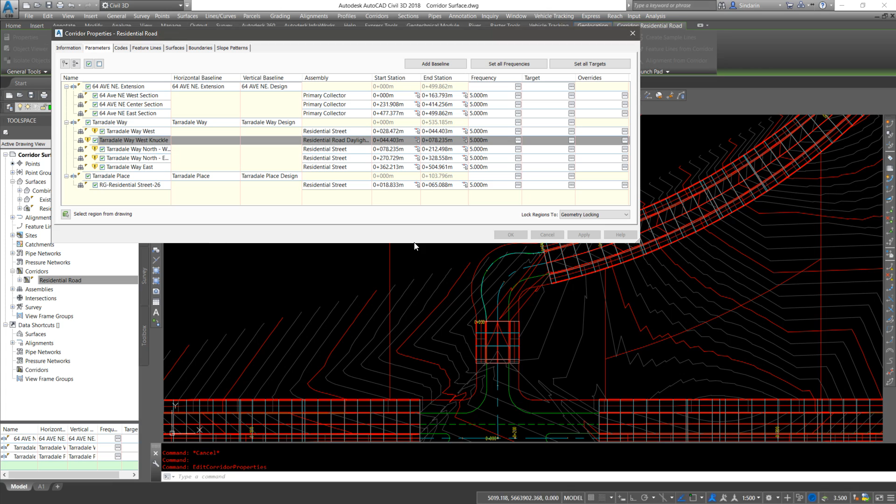I'm going to name it Tarradale Way West Knuckle. And my assembly is Residential Road Daylight Right. We'll click OK. I'm going to set the frequency of this to 5, just so we can see what's being built. And I'm going to hit apply and rebuild to make sure I've done it correctly. So because I've specified that right hand side one, it's only building from the center to the right hand side of the road. Now if I hit OK, my surface will update.

So now I'm going to go back into corridor properties. Now this is where it starts to get a little bit tricky. We're going to have more baselines. We're going to have more regions for our knuckles. So for this knuckle, I need to add another baseline. I'm going to name it West Knuckle. And my alignment will be the West Knuckle. So I'll click OK. My vertical baseline, West Knuckle Design. I'm going to right click, I'm going to add a region. I'm going to name this just West Knuckle again.

Now, the curb return fillets. So when we define this, I set it up for the left would have our sidewalk on it, the right would have our sidewalk on it. Now again, direction of travel, 0 is here, 44 is here. So we want curb return fillets left. And I'm going to click OK. And I'll hit apply to make sure I've done it correctly. Rebuild. And again, the reason it's truncating this is our frequencies.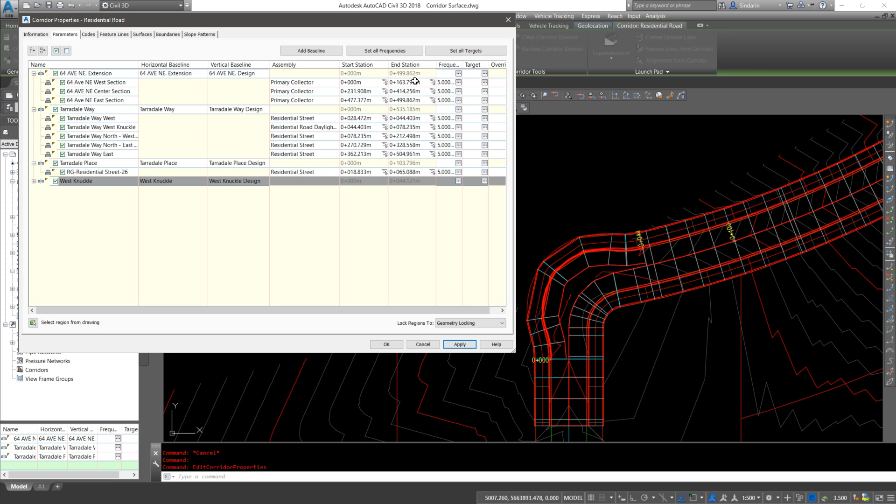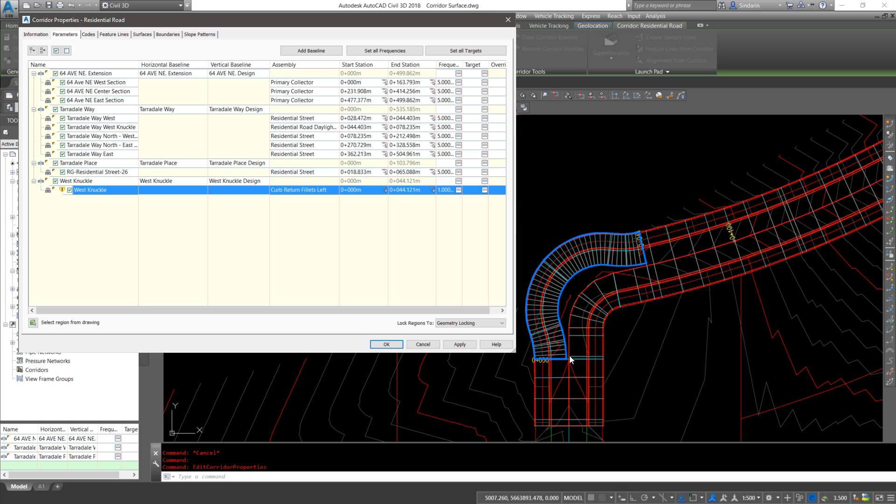So for this west knuckle, make sure you select the right thing. I'm going to set these to 1 meter. And I'll rebuild it so it just looks a little bit nicer. Did I not hit rebuild? There. So I've rebuilt it now, and it looks a lot nicer. But what can we see Civil 3D not doing? It's not building anything in the middle. So if we hit OK and let it rebuild the surface, it will still pop up, but you have a very obvious error here.

So if we go into corridor properties again, under west knuckle, there's one tab we haven't really played around with yet. That's the target tab. So I want the road piece to target something. I want it to target my center line. So I'm going to select the target here. It opens up another little window. So this is the corridor target mapping window. So for widths and elevations, I've already specified those in my main road, so my Taradale Way.

So my width target, I'm going to click on where it says none, and I'm going to find Taradale Way, and I'm going to add that in. So again, be very careful what you're selecting, and again, you can see why it's so important to name things properly. I'm going to hit OK. My outside elevation target, now I want the elevation at the middle, so where it hits the center line, to be the same as my original road. So I'm going to target the elevation target of 64th Avenue Northeast, or sorry, wrong one, Taradale Way, Taradale Way design.

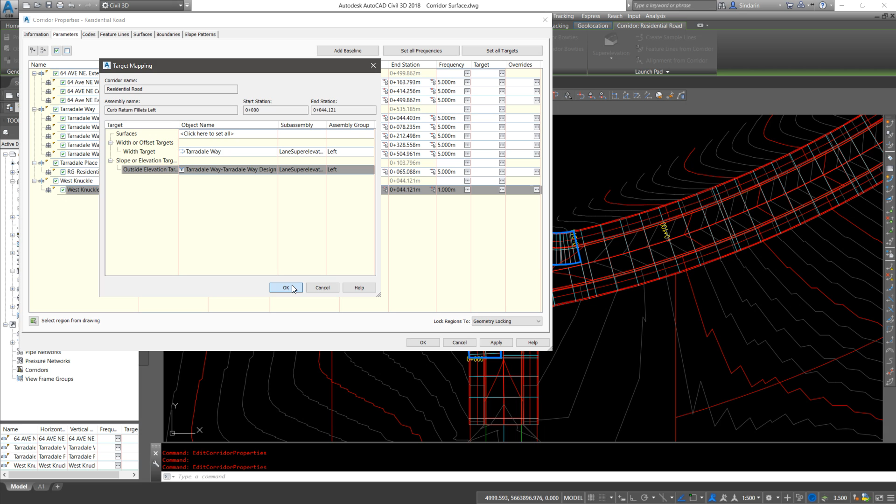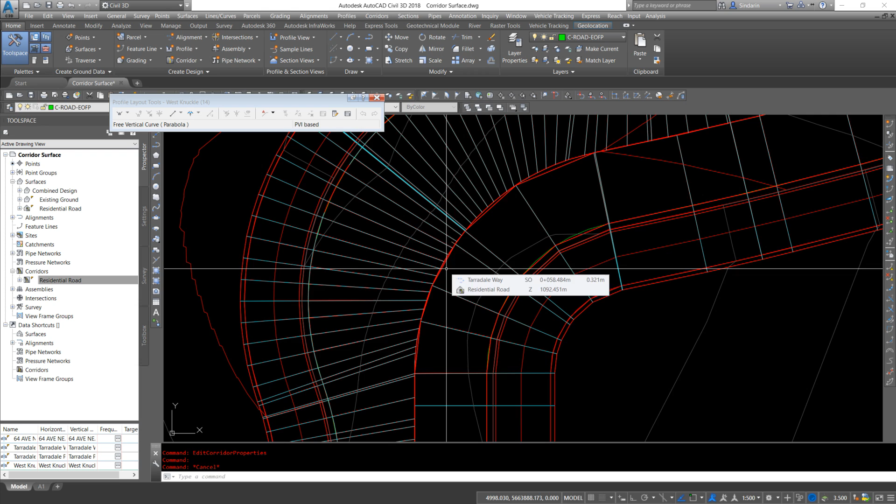So I've defined horizontally target Taradale Way, but target Taradale Way design, so there's no bumps in my road. So I'm going to hit OK. I'm going to hit apply and rebuild. And as we see, the corridor has updated. So now if I click OK and I zoom in, it has now built me a surface, and it's matched the high points in the road. We have positive drainage to a low point right here.

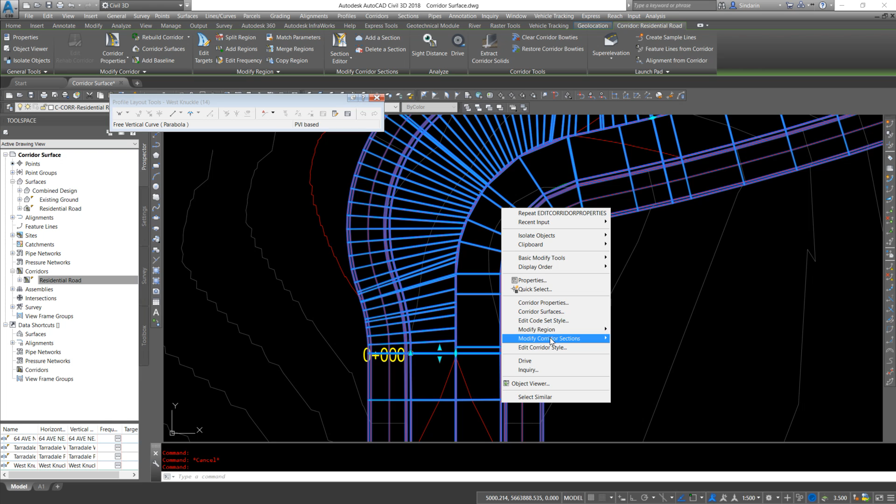We can see from the contour lines that we have a low point right here. And again, just experience to know that this would be a low point. We could turn slope arrows on if we want. Now, we have some more truncated issues down here. So we could go into corridor properties, and I'm just going to set all my frequencies for 1. Again, be very careful if you decide to do this. So I'm going to set everything for 1. It should make me a nice, relatively smooth surface.

A smooth corridor and a smoother surface. So that is how we define a knuckle. So we will build the other knuckle the exact same way. So that's our west knuckle. We would build the east knuckle the exact same way. As I already have the alignments and profiles done, I will just go and build that quickly.

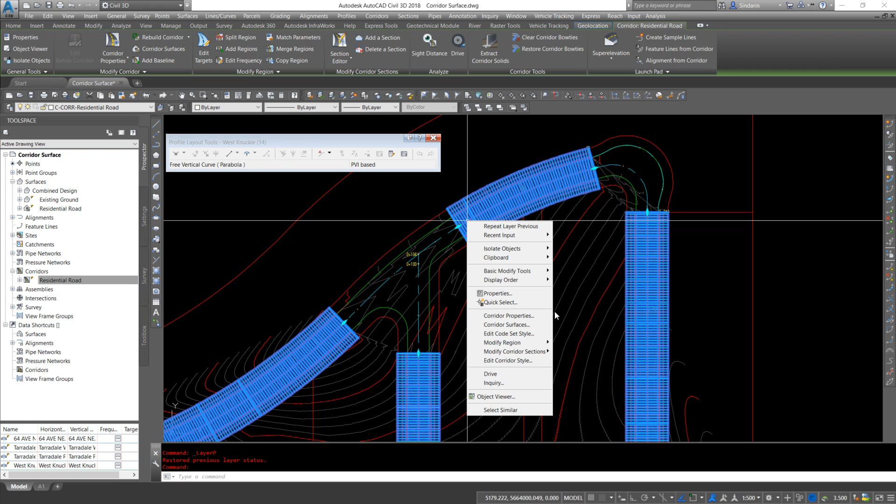So I've turned them back on now. Go back into corridor properties. I'm going to run through this a little bit faster. So we have our west knuckle. We have our road. I want to insert a region after to build this knuckle. Residential road daylight right, and name it Taradale Way East knuckle. Okay.

And I'm going to come down. I'm going to add another baseline. East knuckle. Make sure to set it for east. East knuckle design. Add a region. Curb return fillets left. East knuckle. Again, set all my frequencies back to 1 so I can see what's being built.

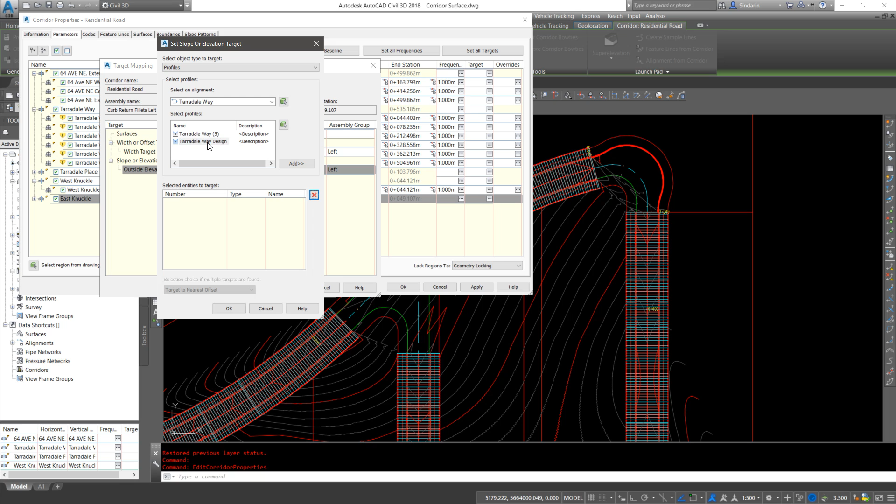Make this a little bit bigger. Set my targets for the east knuckle back to Taradale Way. And the center to Taradale Way Design. Make sure I actually clicked on that. We'll click OK. OK. Apply, rebuild. And if I've set all the settings up correctly, we'll have another knuckle. So we have our 2 knuckles done.

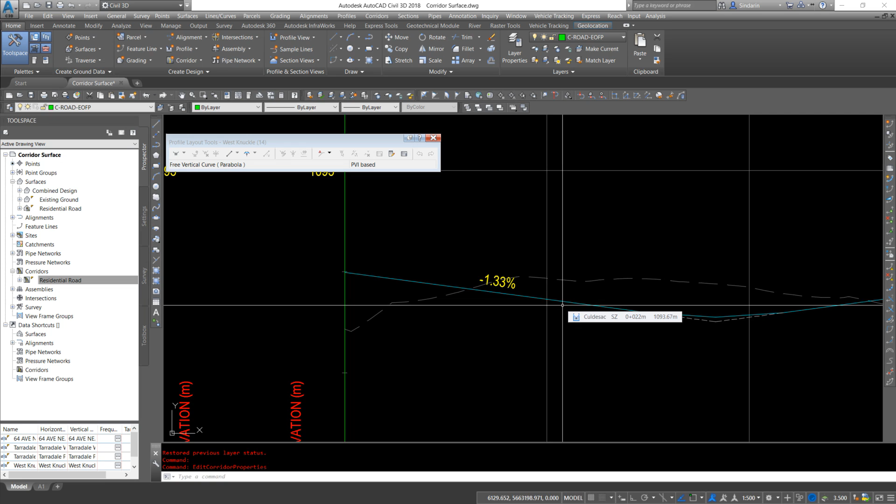Let's run through the cul-de-sac quickly. Again, I've defined the cul-de-sac. I've defined a low point in it. All the water should slope to the end of the cul-de-sac. I tried to match the slope of my cul-de-sac road, so 2%, or sorry, that's 0.95%. I've got these coming down at 1.3. Again, play around with it, try and see what works.

So again, back in corridor properties, I'm going to add another baseline. Name it cul-de-sac. My cul-de-sac. Okay. Cul-de-sac design. Add my region. Cul-de-sac. Now again, where is 0? So my 0 is on the left-hand side here. It's going around this way. So I need curb return fillets, or sorry, residential road daylight right, I believe, for this one. We'll find out as soon as I click OK.

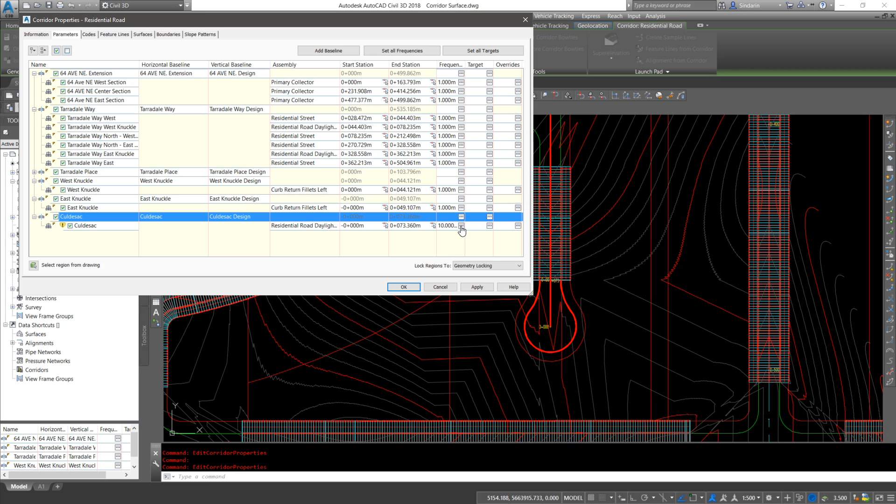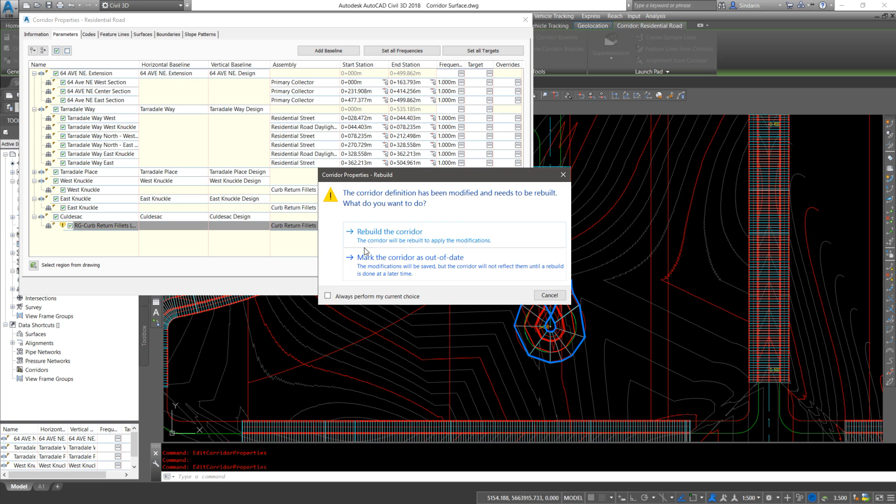So residential road daylight right. I'm just going to hit apply to make sure I've got the right one. And I do not. So residential road daylight left. Apply, rebuild. And I selected the wrong one again. So curb return fillets left. Sorry about that. Apply, rebuild. Okay, let's just hit OK so it gets rid of the blue ghosting.

All right. Go to our properties. I'm going to change my frequency again to 1. We'll hit OK. And my targeting, again, it's the exact same way as a knuckle. I want to target my cul-de-sac. Or sorry, that is the wrong one. I want to target Tarradale Place. So that's my Tarradale Place centerline alignment. And my Tarradale Place design. We'll click OK. We'll click OK. Apply and rebuild to make sure it's correct.

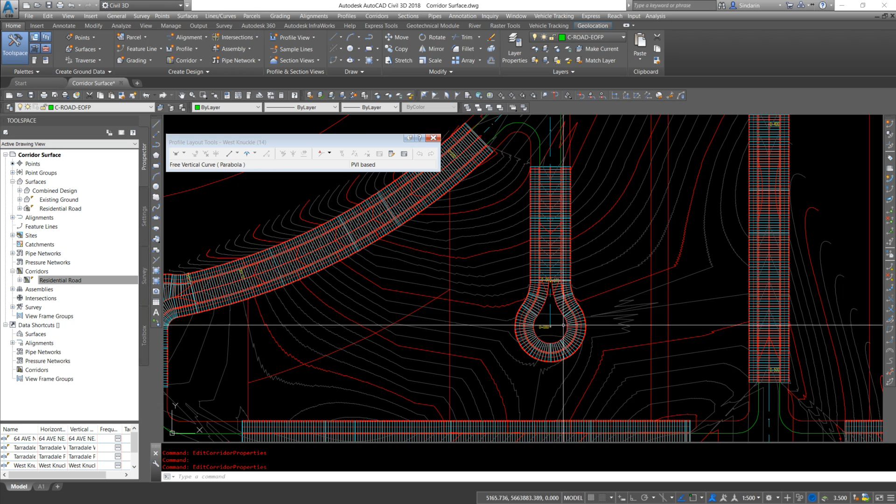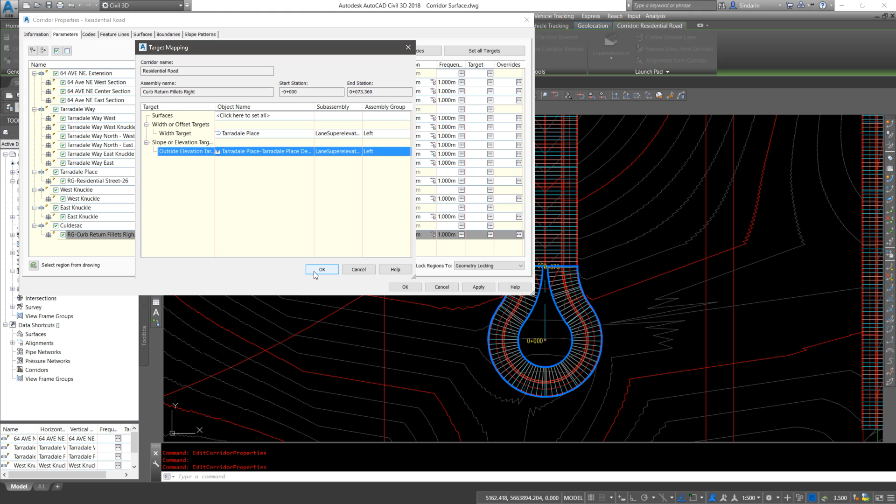And I might need curb return fillets right. And if we hit OK, it is not targeting the center line. So let's go diagnose that. Corridor properties, target. I thought I filled these out. Maybe when I switched things around, it got rid of them. So Tarradale Place. Tarradale Place design. Okay, okay. Apply, rebuild. There we go.

And we now have our cul-de-sac. So again, there needs to be a little bit of tweaking done on the vertical alignments in order to provide positive flow, but everything generally right now drains to the south end of the cul-de-sac. So in this video, again, we created our main roads, we did a couple knuckles, we did a cul-de-sac.

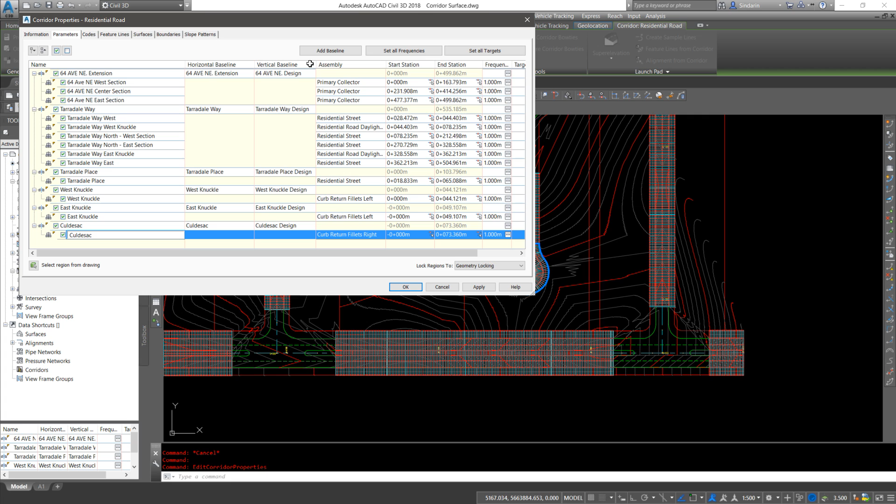And again, if you're not into naming things properly, this is when you're going to get into trouble. Everything in here is named nicely. I know what it's doing. I can update this. I know what I've selected on. I've named my items properly. I've kept myself straight. I know what each item is. I know what each item does. And again, it takes a little bit of practice to get into this and know how to do it. But naming things right off the bat is going to be your saving grace here.

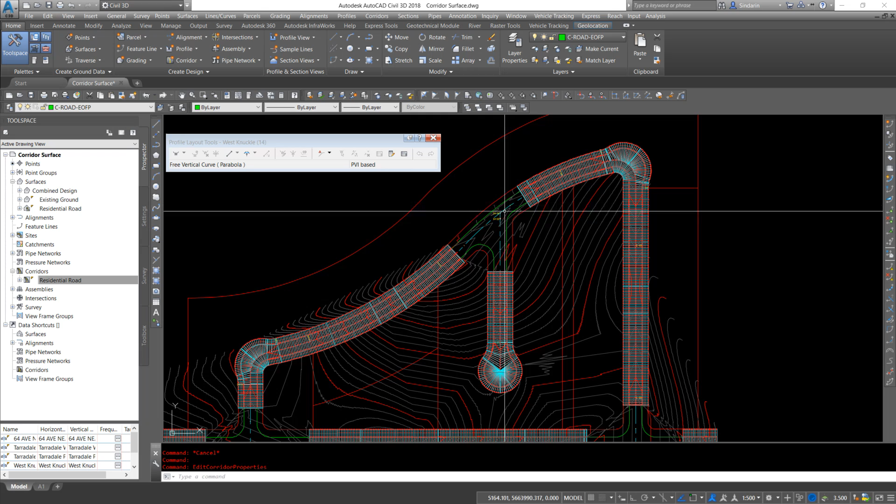So we weren't able to get into the intersection tool in this video, so that'll be another video. There's a little bit more we have to worry about. We're going to create 3 additional corridor pieces. We don't want to add them all into this main one. So for intersections, watch the intersection video.